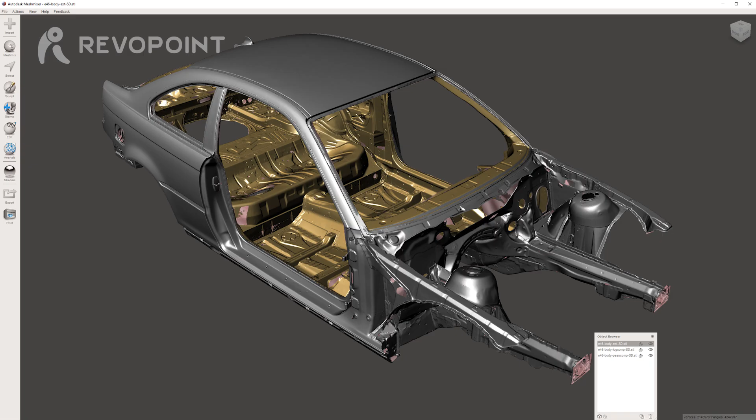My friend Lajos from Modception yesterday scanned a car chassis, and the result is pretty good. He's also going to share the result with you guys, the scan and the CAD. He put all the sections together with a tolerance of 0.25 millimeters, a quarter millimeter, which is great. This raises a question you might be interested in: how accurate is Trackit?

On the product page we say the accuracy is 0.025 millimeter plus 0.04 times the length. So here's what I'm going to do to test it today.

This thing is called a ball bar. It's normally widely used in metrology, and this one was freshly calibrated this morning. The result is 999.5713 millimeters, really precise, 4 digits. This was freshly calibrated by a CMM machine. If you don't know, CMM stands for coordinate measuring machine.

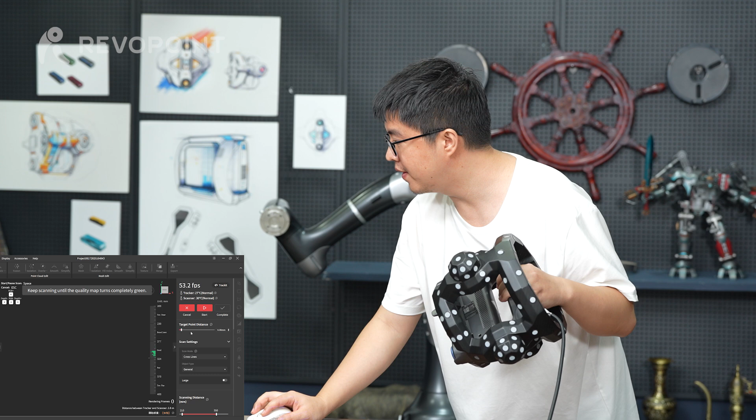Our plan is to scan this ball bar with Trackit in the 3 coordinates, X, Y, and Z, and we will compare the difference in Geomagic Wrap with what was calibrated here. Scan number 1, let's go.

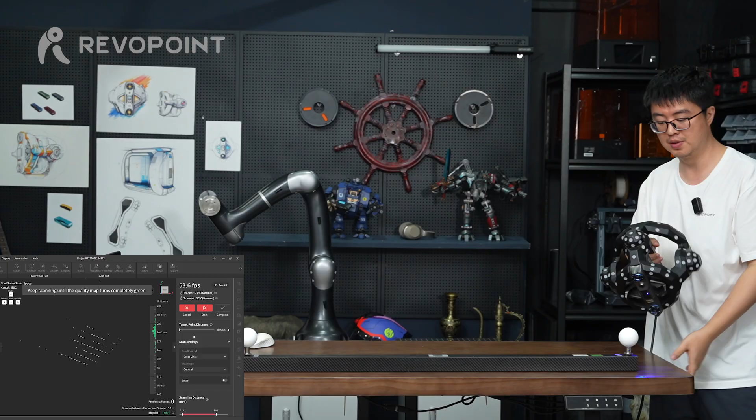First, let me set the target point distance to minimum because I want the best detail and accuracy. Let's just work on the 2 balls here, because the distance that's calibrated is the distance between the 2 centers of these balls. Here we go.

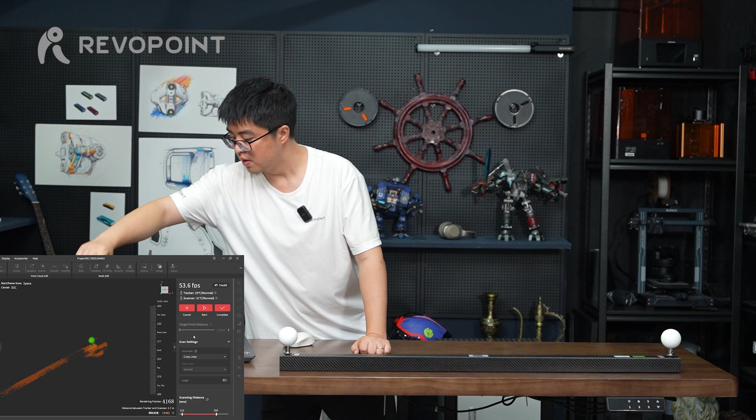After fusing this, I'm just going to export the point cloud and try to calculate the distance and compare with the real distance here.

With a little cleaning, do an overlap. We don't need to do the meshing, we just export the point cloud for the measurement, and that'll do. I'll just call it number 1.

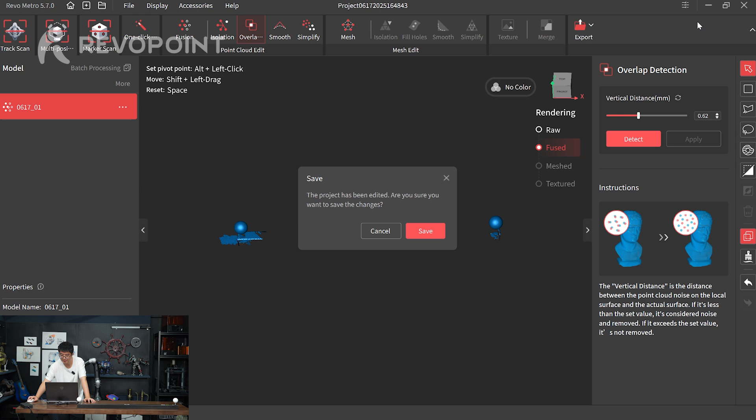This is the software I'm going to use, called Geomagic Wrap. Pretty familiar software if you're in the 3D industry, widely used in measurement.

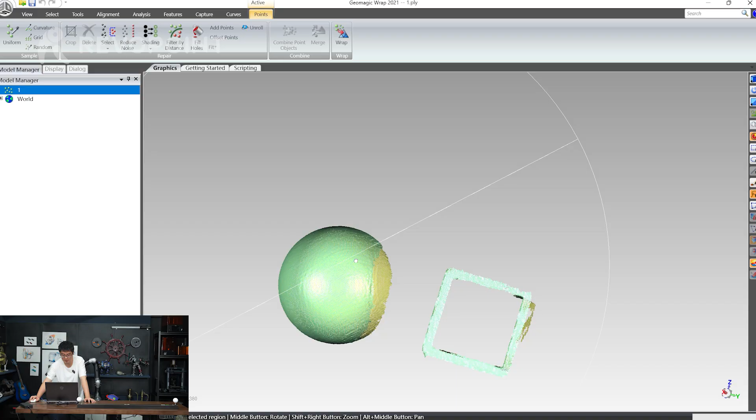What I'm going to do now in this software is find, I think it's under feature, the center of the two balls. I think it's the sphere. Number 1, apply. Next.

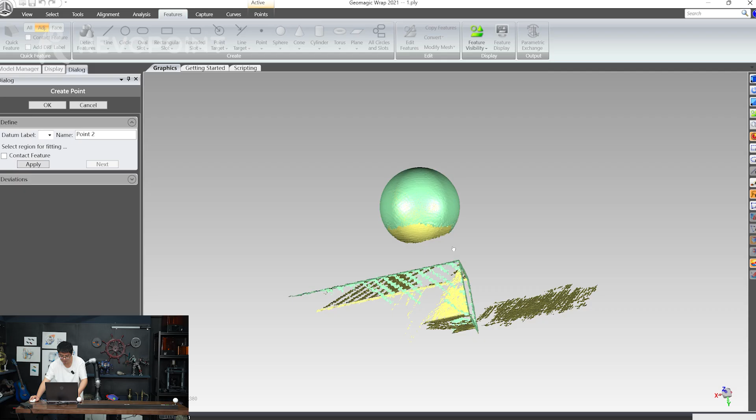Number 2, apply, point 2.

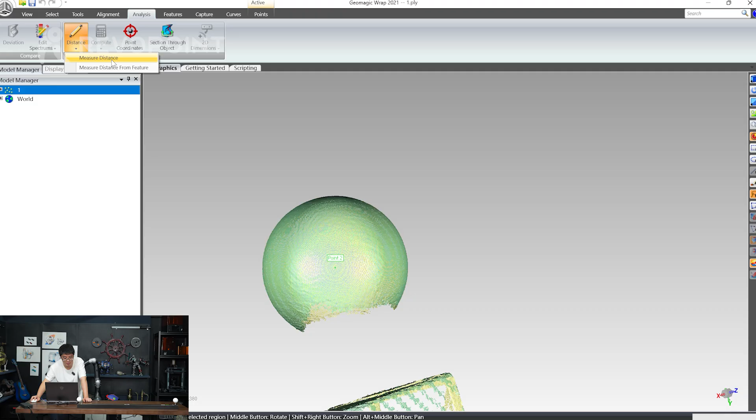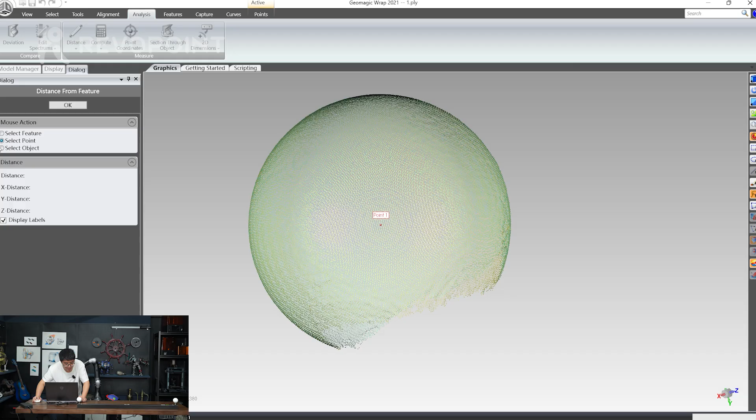Now just to find out the distance between the two centers, the 2 points, measure from feature: point 2 and point 1. I think I have to go back to feature. Wait, so I have to manually click to point 2, I think. Okay, done.

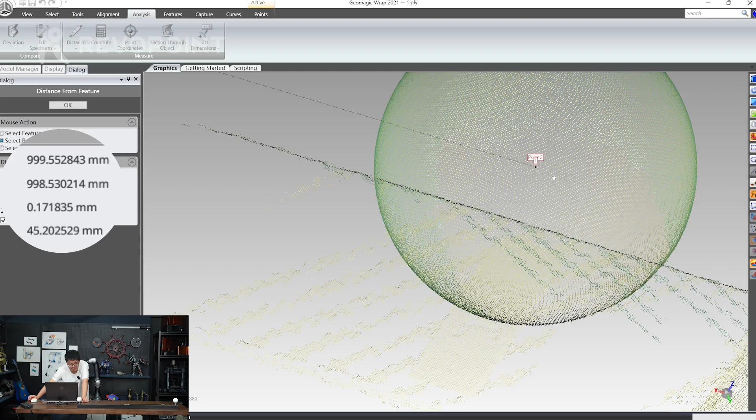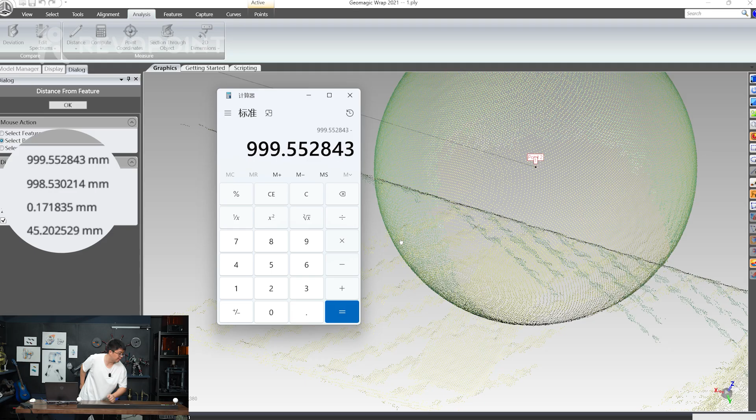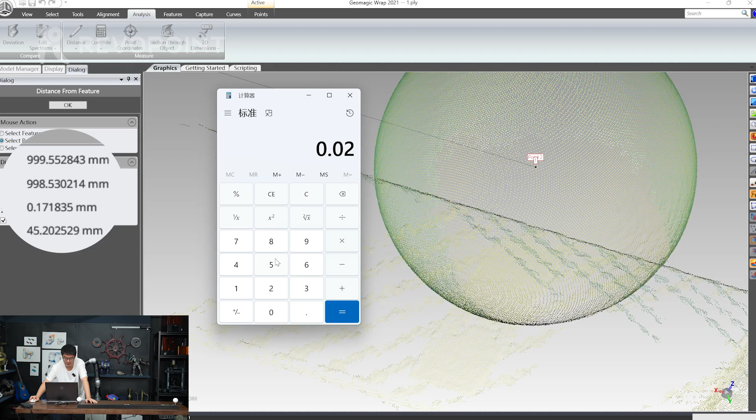Of course this meets the requirement, because this 1 meter long ball bar we claim is 0.025 plus the volumetric accuracy of 0.04 times length. The length is 1 meter — we're not going to use that 999, just consider it 1 meter — 0.04, which of course meets the requirements in the x-axis.

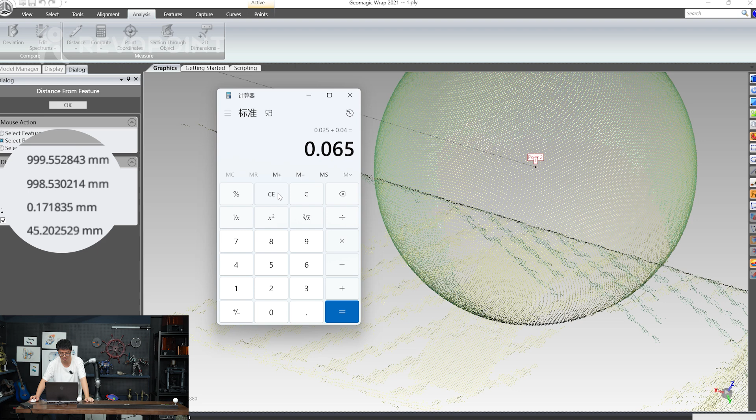Step 2, now we try to scan it in the y axis and compare it again. Finally, we're going to compare the median average number of the 3 results. Scan number 2, the y-axis.

Could you adjust my tracker? Okay. Okay, cool, thank you.

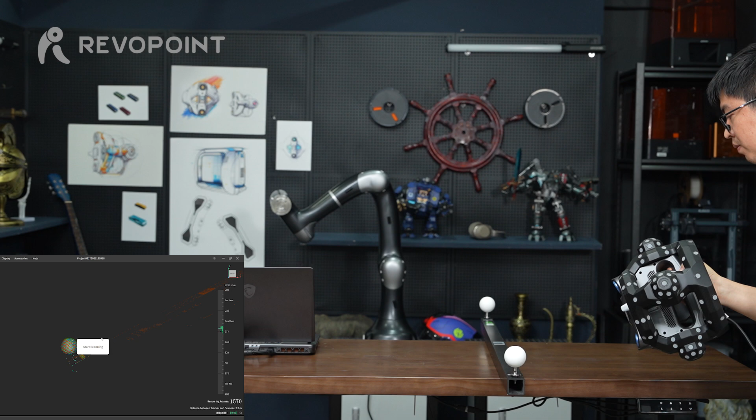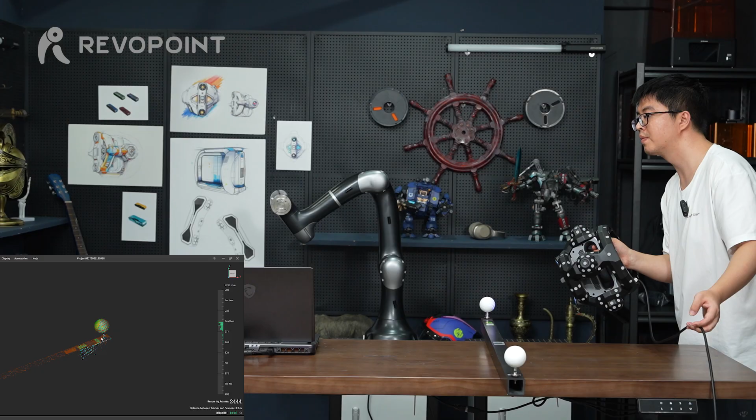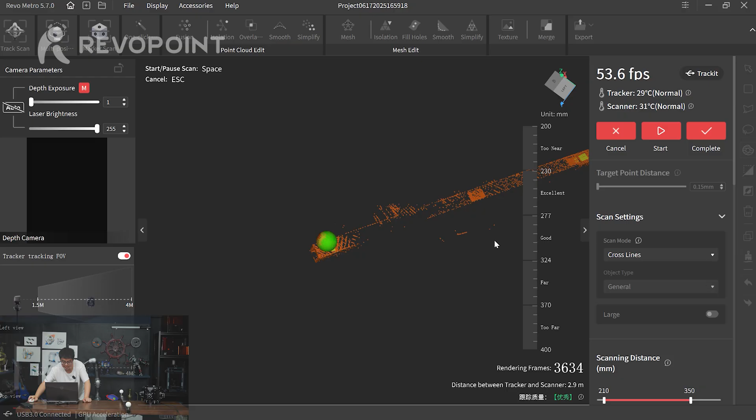Now let me scan it in the y-axis. Again, same thing, let me put it at 0.15 millimeters. Scan number 2. I missed a little part here, but that's fine. Let's fuse it and set the same 0.30 millimeters distance.

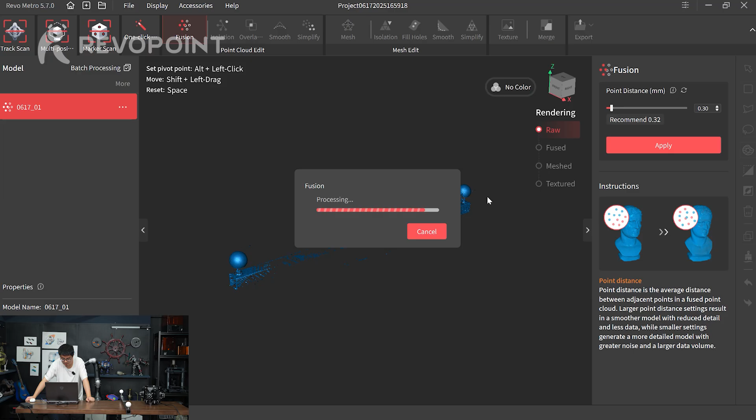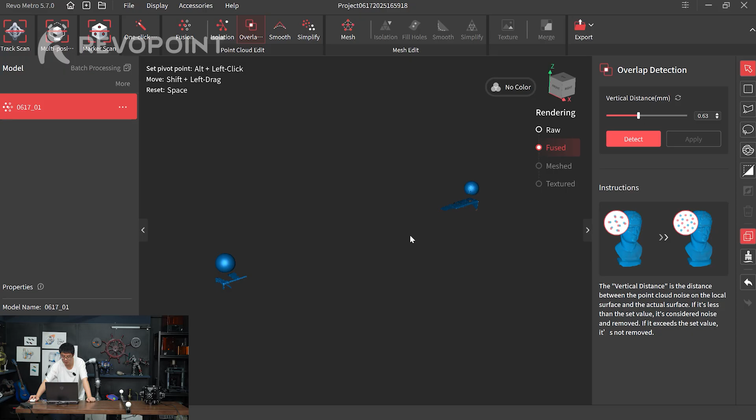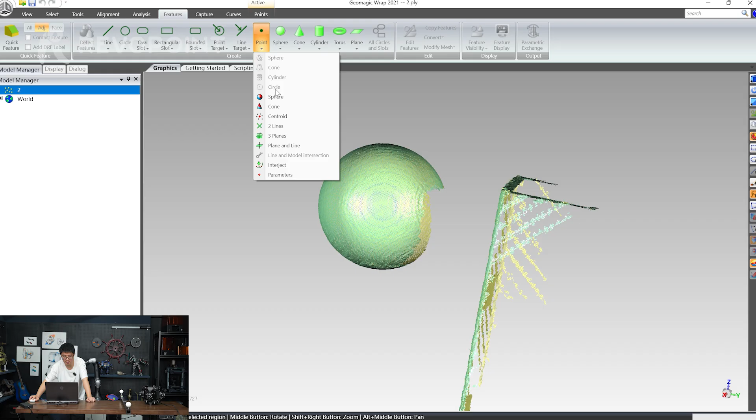Now I'm going to name it number 2. And again, Geomagic Wrap, now open number 2. Same thing: find the sphere, find the center here. Okay, it's number 1.

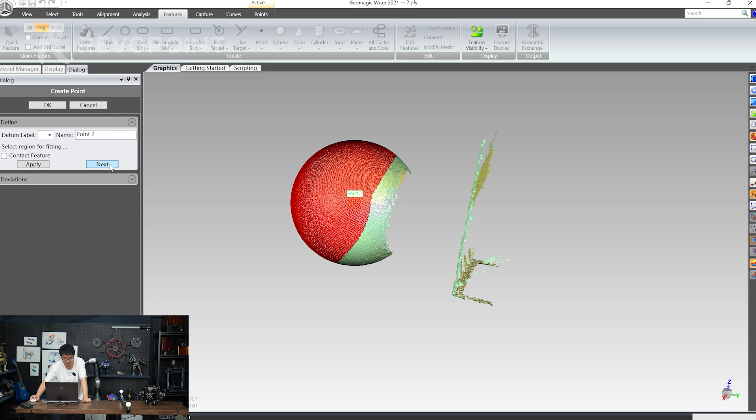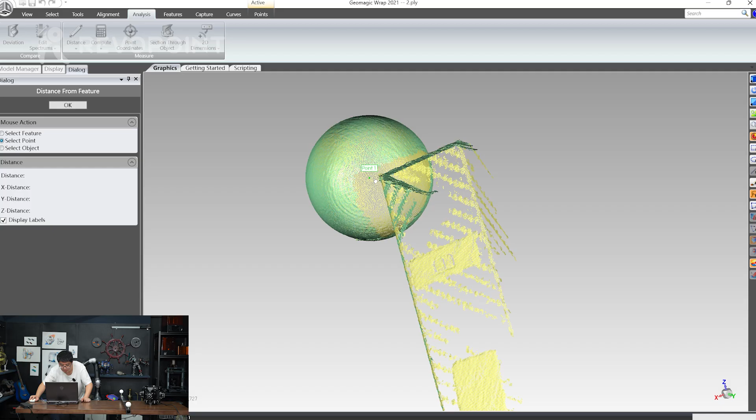Number 2. Feature 1 and feature 2. Oh god, I wonder how I just measure between the 2 features. Anyway, I got it.

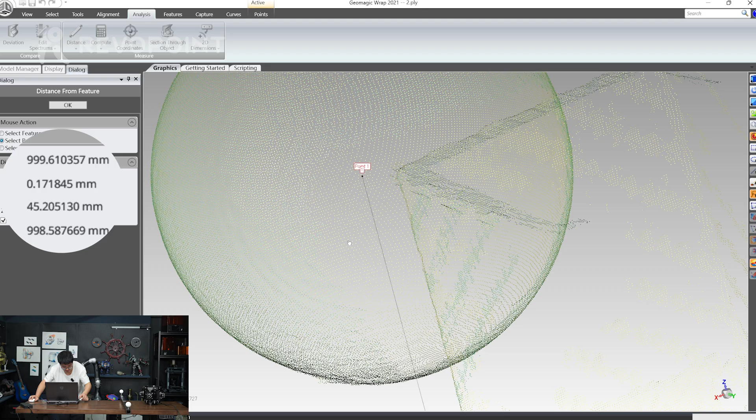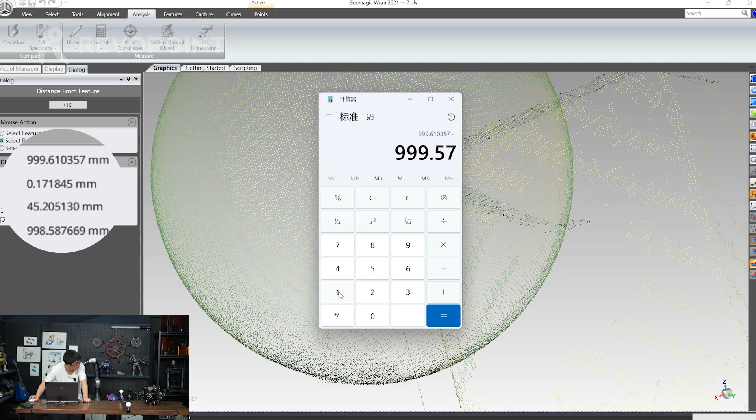999.610357. Let me do the math again: 999.610357 minus the real number, 999.5713 — wait, it's 57, right, 5713 — so I got 0.039057. Let's say it's 0.039, which is less accurate than the first scan, but still meets the requirement.

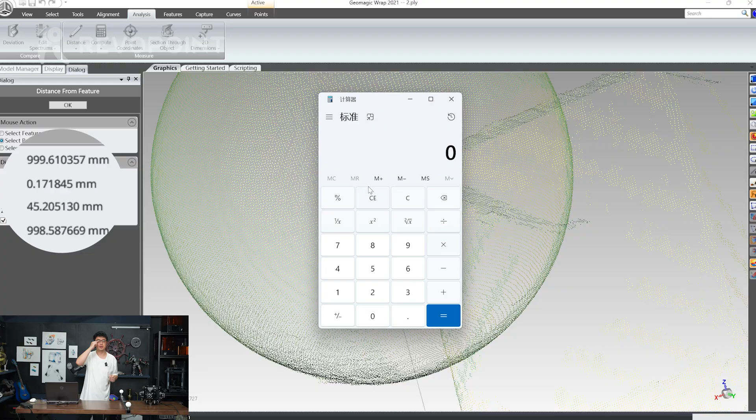Now let's do the final scan, which is the Z axis. Scan number 3. Let me hold on.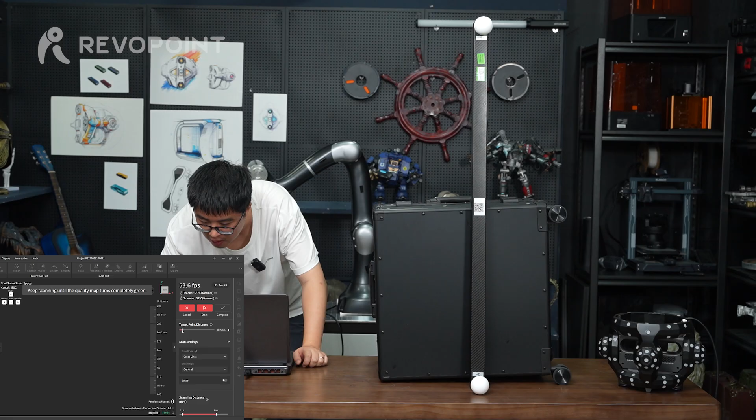I don't really want it to fall off, so I need to recalibrate it. Let's just do it this way. Same thing: 0.15 millimeters, and let's go.

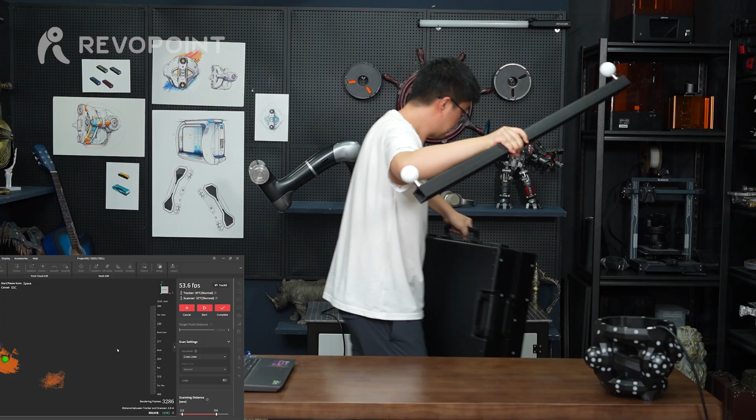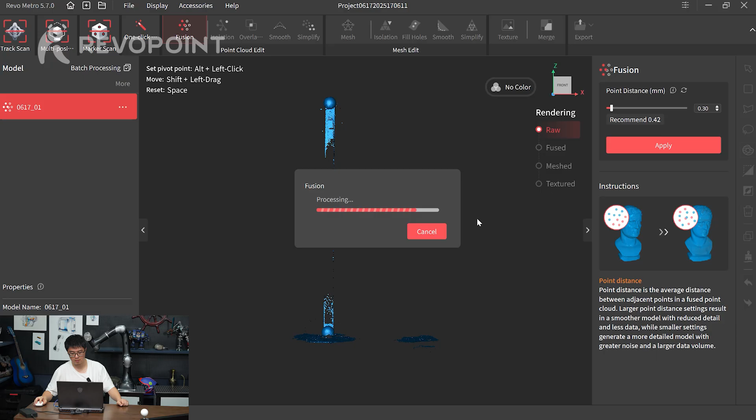Careful. Same process. And that's number 3.

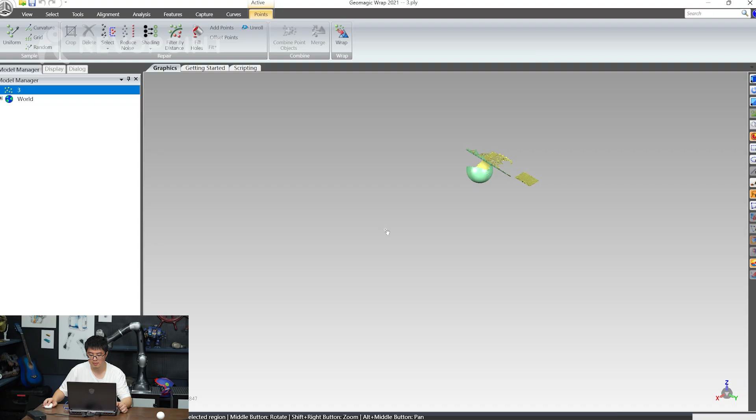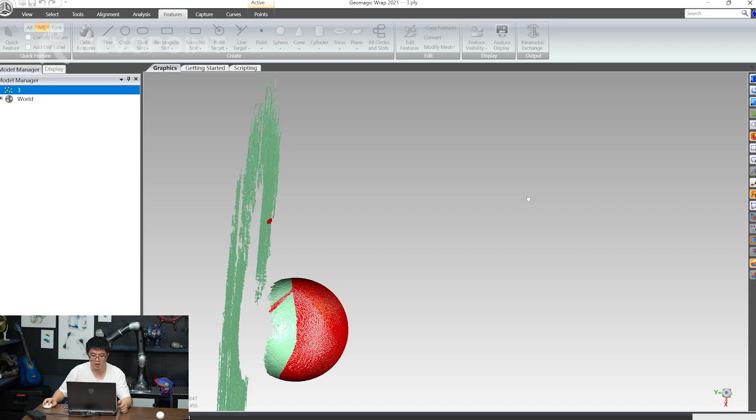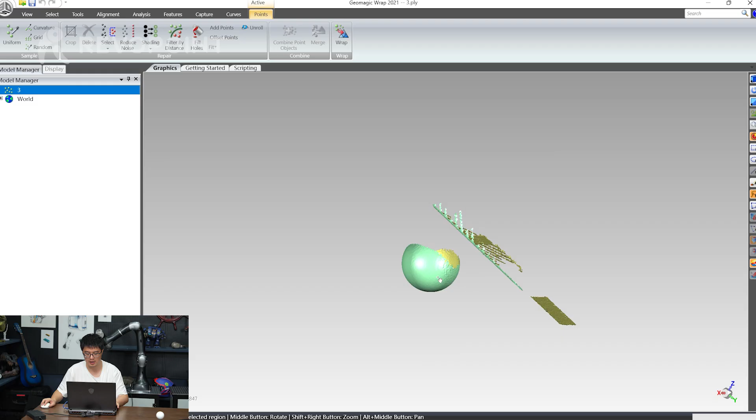Number 3. Feature, sphere. Oops. Now how do I cancel it? Alright, not very familiar with this software, alright? I'm just not smart enough to use it. I think I triggered some bug. I always meet this when I try to cancel it, and I found I have nowhere to return to.

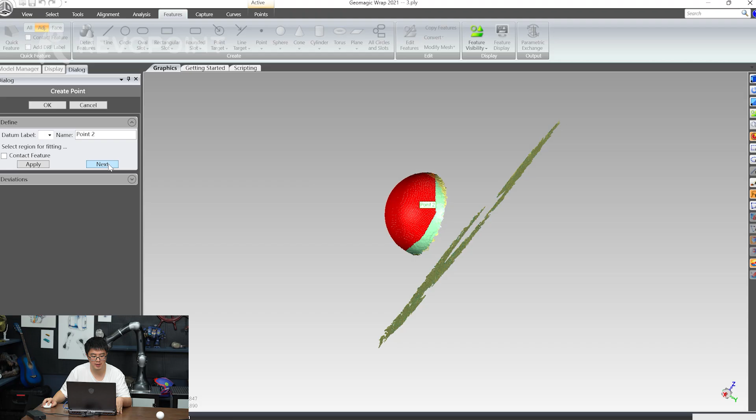Well, anyway, again, sphere 1, apply, got it, next. Sphere number 2, apply. Okay, so analysis, get it, 1, and get it to number 2.

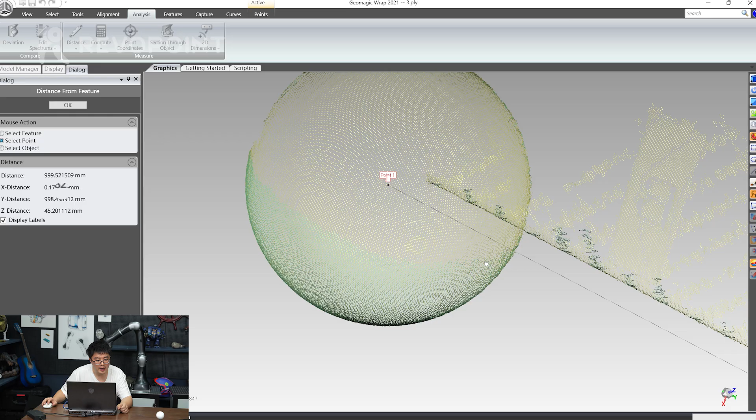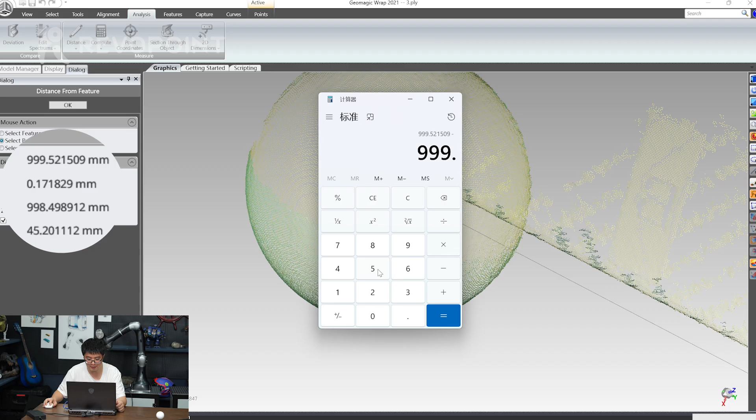Okay, I got 999.521509. Again, calculator: 999.521509 minus 999.5713 — double check, is that the correct number? Yes. So I got 0.049791, which is about 0.05.

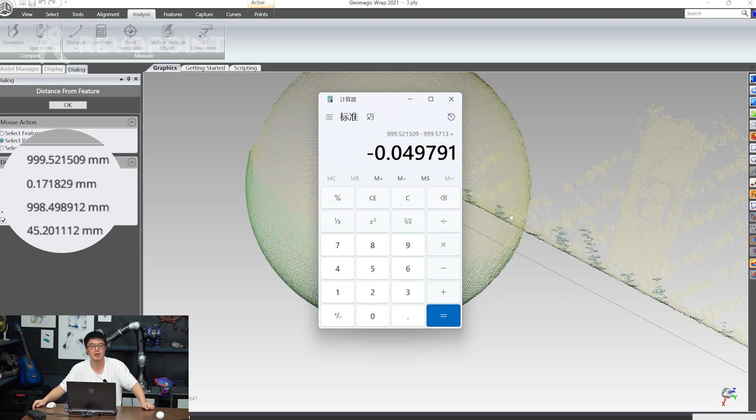Still meets the requirement, so I don't think there's a need to calculate an average of the 3, because all 3 do meet the requirement.

Another thing is, you see how I struggle with Geomagic Wrap. It's a great software, it's just my problem — I don't know how to use it, not familiar, and it's very hard for me to learn. But is there a software that's so easy to use, very user-friendly, and more importantly, doesn't cost that much?